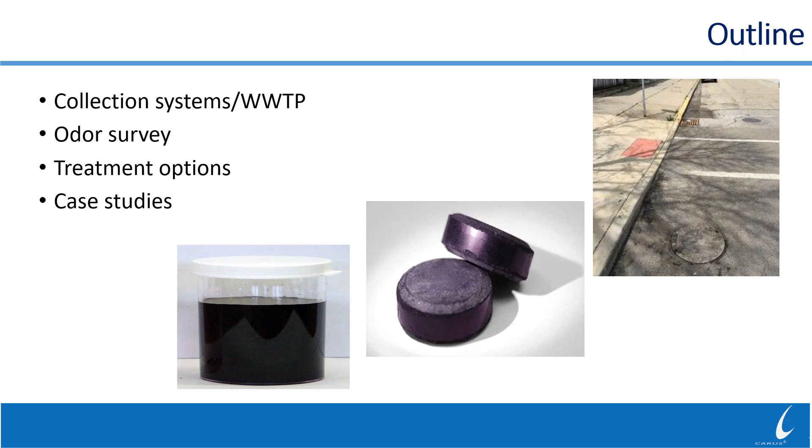So one of the first things you should think about when you get asked about an odor complaint is what type of odor are they experiencing? Is it being formed in the distribution system? Is it being formed in the plant? Where exactly do you have those odor issues? What are the reasons why you're looking to treat it? It could be as general as worker safety, which is very important, or it could just be nuisance complaints from neighbors near the plant or near that part of the collection system.

And then what are your options? There's maybe some simple things you can do to eliminate some odors at different parts of the plant by just moving the wastewater or getting the sludge through the plant quicker. But obviously, if you can't do that, then there's some things you can do for odor control that are chemically based.

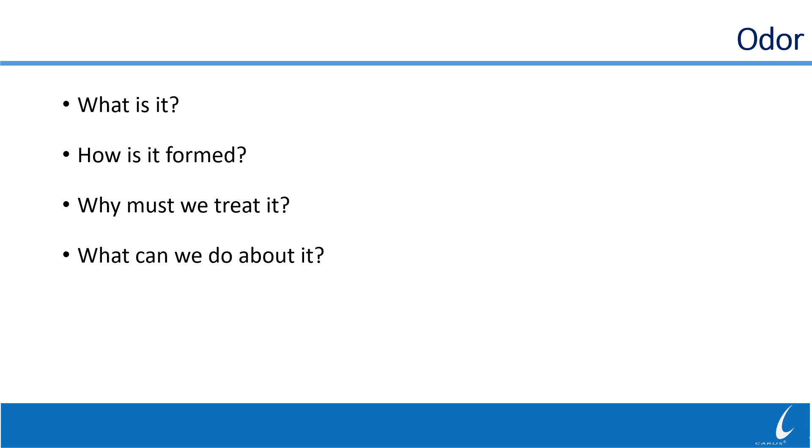When we talk about a wastewater system, there's a lot of moving parts and it's a very large system. You can be out in the collection system where you can have pump stations and force mains and gravity sewers, which are all different parts where you may have to do treatment. And the treatment may vary depending on where you're at in the collection system. You might have the ability to stage equipment and a pump, or you may need to have everything below the manhole cover or below the wet well cover, so you can't have anything exposed to the environment.

At the wastewater treatment plant, obviously you have the headworks where you might have some odor issues, but a larger source of odor is typically farther back in the process where you're doing sludge dewatering on a belt press or a centrifuge prior to trucking the sludge off to a landfill or for land application. The general issues that most plants experience are going to be nuisance odors. So they're going to have hydrogen sulfide and mercaptan odor issues from that process.

You may see some general equipment corrosion. Hydrogen sulfide can be very corrosive to both concrete and metal in the area. So if you're getting a lot of off-gassing of hydrogen sulfide, you can see that the concrete might be corroded. You might see rusting of the metal in those facilities around those high levels of hydrogen sulfide. And then in the collection system, you might see issues at pump stations, lift stations with grease removal, where the grease accumulates around the floats.

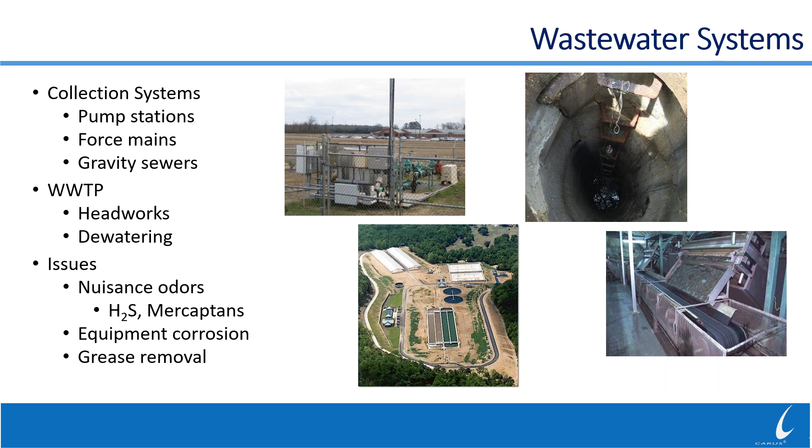Now, it's odd to talk about what type of odors you may encounter in wastewater, but sometimes they can tell you that you've got different compounds than the traditional ones. If you have an organic kind of smell that smells skunky, it's typically going to be some type of mercaptan-based odor. You can have other things like fishy, which would be nitrogen compounds. Obviously, depending on the type of wastewater you're treating, you might have an ammonia smell, which would be ammonia compounds. You could have fecal, decayed flesh, all sorts of different types of odors that you may encounter.

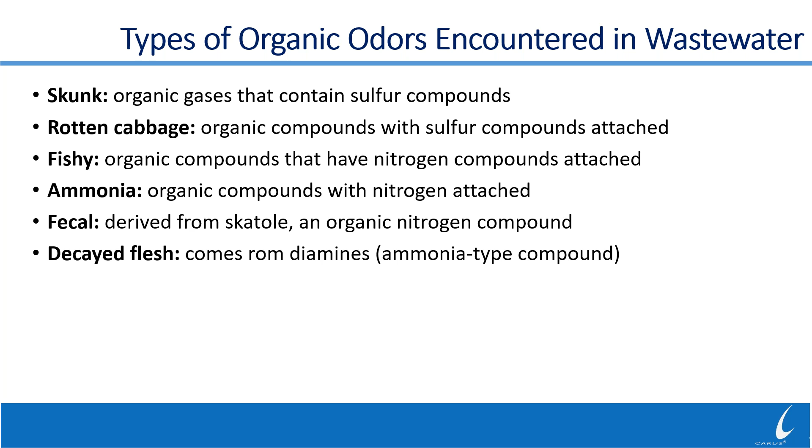One of the other things about mercaptans as well is a lot of people will claim that it clings to them. So if they're around an odor source that's generating some mercaptan, when they leave the area, they'll still be able to smell the mercaptan slowly over time as it comes off their clothes and out of their hair. One of the major compounds that we'll talk about is hydrogen sulfide, which also has a very low odor threshold and has the very distinctive smell of rotten eggs.

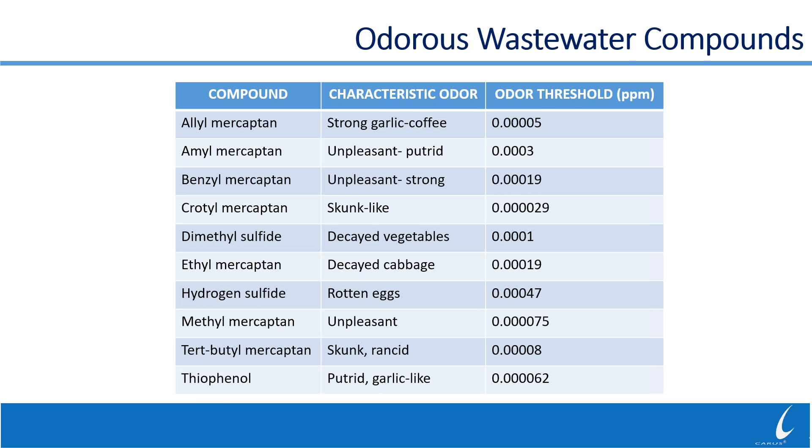So when we talk about wastewater issues, hydrogen sulfide is usually one of the easiest things to measure and usually is the one that's causing the most odor complaints. You may have some of the other mercaptan compounds mixed in as well, but they'll typically be at much lower levels. Some of the other things you want to be concerned about when you're doing an odor survey is you could have other gases that you may encounter. You may have a strong ammonia smell, which can cause your eyes to water.

And then you also have to be concerned with the hydrogen sulfide because you might also have it mixed in with carbon monoxide or carbon dioxide or even methane, depending on where you're at. So definitely when you're in confined spaces or areas where there's not a lot of airflow, you want to be concerned because all those different gases can displace oxygen from the air, and so it can be a hazardous environment for you to enter.

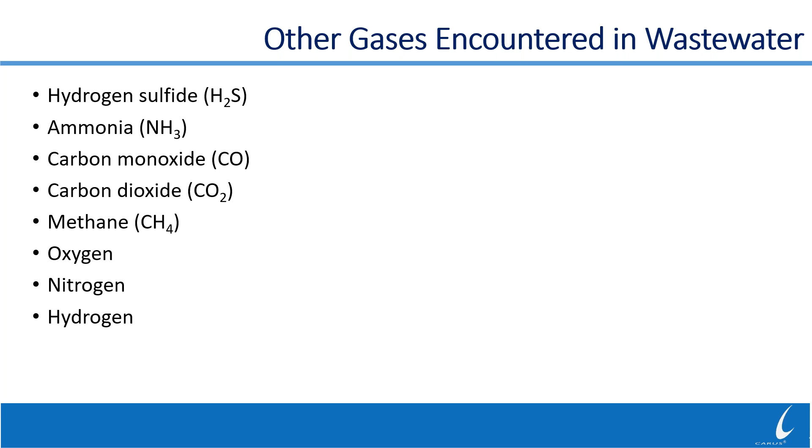Like I said, one of the largest compounds that you're typically going to encounter in wastewater is going to be hydrogen sulfide. It's colorless. It has the very distinctive rotten egg odor. So when you first walk into an environment with hydrogen sulfide, you'll definitely get that rotten egg smell. It's water soluble, so a portion of the hydrogen sulfide will be in solution, and then a portion, when it gets stripped out, will go atmospheric. It's extremely toxic. You're going to see an OSHA chart on what are the acceptable levels to be in the environment when you're around hydrogen sulfide.

In addition, hydrogen sulfide can mix with moisture in the air to form sulfuric acid, which is why it can corrode concrete and corrode metal in the application. Depending on how high the level of hydrogen sulfide can get, it can even get into a range where it can be considered explosive.

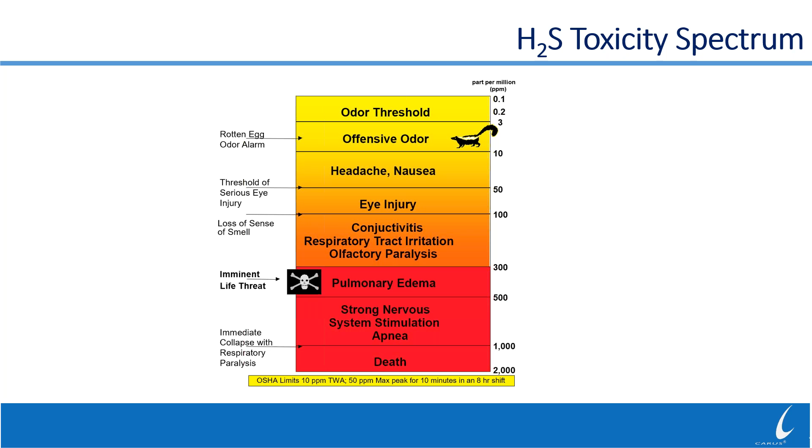So how does that hydrogen sulfide form both in your collection system and in your wastewater plant? Well, one of the things that's always present in your wastewater is a lot of sulfate material. So sulfate plus any type of organic material that's in the wastewater, so our waste from humans, will combine with anaerobic bacteria. And what ends up happening is that anaerobic bacteria start chewing up the oxygen off of the sulfate compounds. As they do that, they release sulfide into solution. And then with any type of turbulence, that sulfide that's in solution can come out as atmospheric hydrogen sulfide. So you'll get that kind of loop in the system.

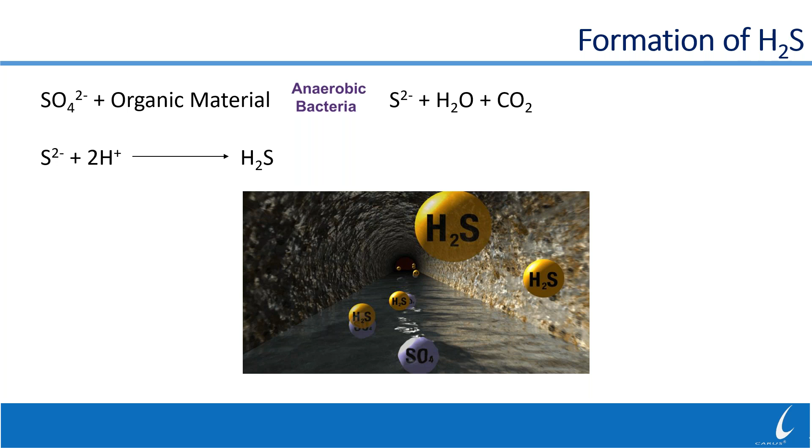And really it's based on the longer that wastewater sits and you lose all your dissolved oxygen, now the bacteria is looking for another oxygen source, and so the sulfate is plentiful, so they go after that oxygen on the sulfate. Keep in mind that sulfate-reducing anaerobic bacteria, they thrive at low oxidation reduction potentials. So when you don't have any dissolved oxygen, they're going to predominate the biofilms out there in the collection system. Ideally, they like pHs between 6 and 9. So those are the standard wastewater pHs you'll see out in your collection system. So that's a perfect environment for them.

Wastewater is always warm. So they have the nice warm temperature to keep them respirating and chewing up the sulfate to generate hydrogen sulfide. So you have a perfect environment both out in the collection system and in your plant. As that wastewater sits, you'll chew up all your dissolved oxygen, and the bacteria are in a perfect environment to generate more and more hydrogen sulfide.

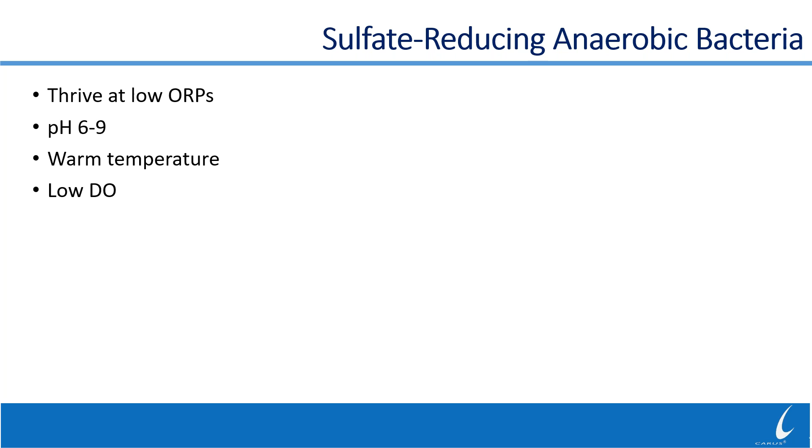That turbulence then, or just the amount of hydrogen sulfide that's in solution, eventually some of it will go atmospheric as it's an equilibrium. So some of it will slowly bubble out of solution. So now you get some hydrogen sulfide in the air in that pipe. It interacts with the moisture on the pipe wall, and you generate some sulfuric acid. That sulfuric acid runs down the pipe wall, corroding the top or the crown of the pipe. And then it comes back into solution, and now you've generated sulfate back into solution that the bacteria can chew on again, and then it repeats its cycle continuously.

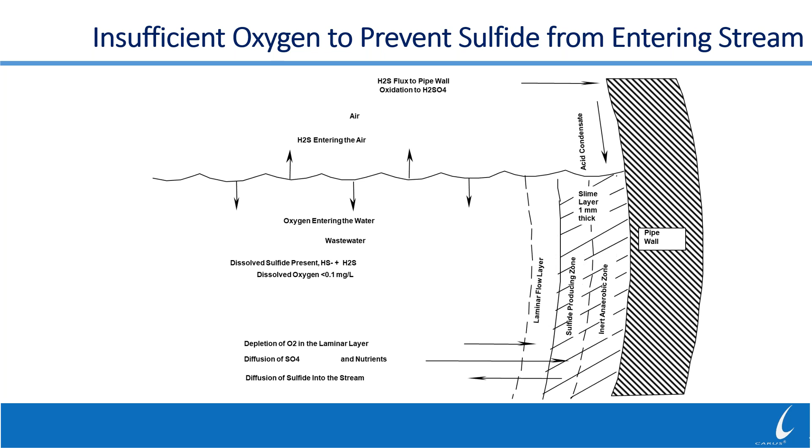So one of the things when you're doing pH adjustment in a system for odor control is you're typically going to try to target a pH above 9, somewhere between 9 and 10. But as soon as that pH drops back down, that sulfide is still there. It can be released back into the atmosphere. So you do need to take into consideration that when the pH drops, it's going to come back out of solution.

A question we get asked all the time at CARUS is, I only have atmospheric numbers for my hydrogen sulfide. Is that a way that I can tell how much dissolved sulfide I have in solution? Well, the answer is it can give you an idea of how much you might have, but because the hydrogen sulfide in the atmosphere is based on the size of the area you're in and how much is being released, it doesn't really translate one-to-one.

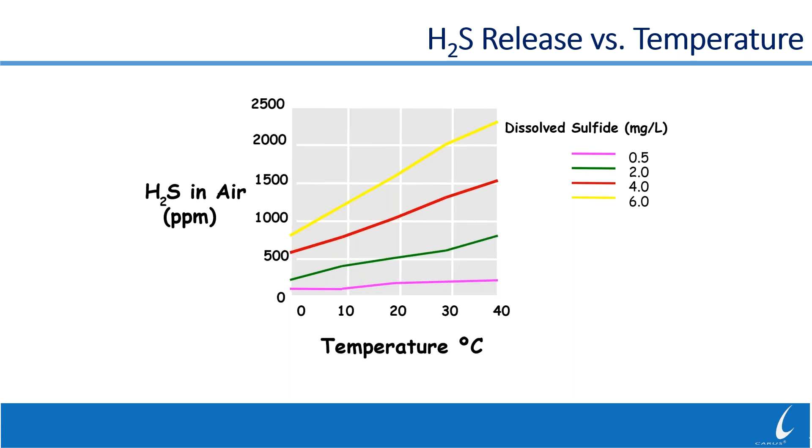When we talk about sulfide, one of the easiest ways to remove it and one of the quickest ways to remove it is permanganate oxidation of sulfide directly. So if you have dissolved sulfide in solution, you can add permanganate directly to that wastewater or that sludge, and regardless of whether it's acidic or neutral or basic pH conditions, we're going to oxidize it.

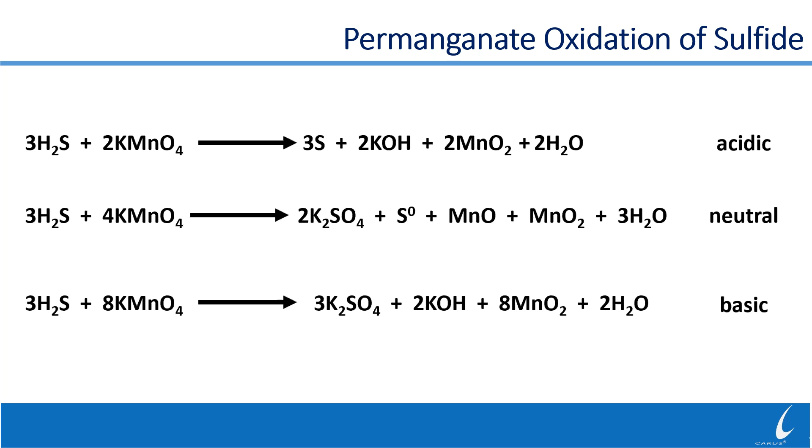One of the benefits of permanganate oxidation is its rapid reaction. As soon as you add the permanganate to the wastewater or to the sludge, it's going to react with the hydrogen sulfide and mercaptan compounds and eliminate them immediately.

One of the tests we do in the field is a jar test called a shake test, where we add wastewater or sludge to a jar, we add our permanganate, we mix it for a few seconds, and then we shake it to determine how much sulfide we can strip out of solution. In that test, just a couple seconds of mixing is enough to eliminate all the hydrogen sulfide and mercaptan, and then we'll be able to measure that we've knocked it completely out in those jars.

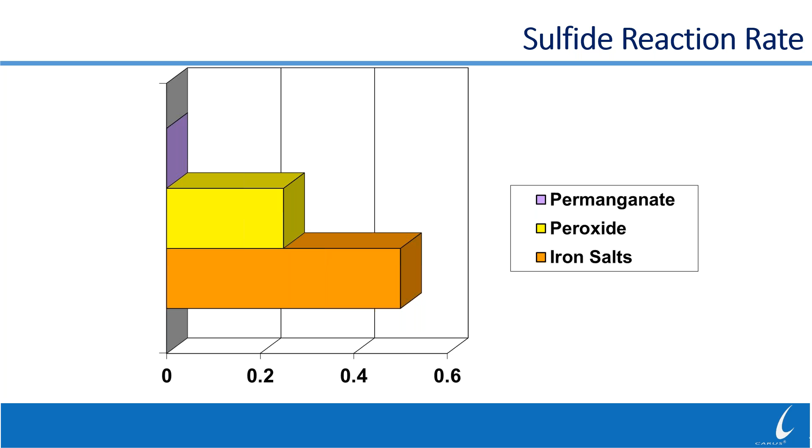Some of the other compounds you may see for odor control are hydrogen peroxide and iron salts. Typically, both of those compounds need reaction time to remove hydrogen sulfide from the wastewater or from the sludge. So generally, you would feed them way upstream and generally have a contact tank or might have multiple feed points in order to knock the hydrogen sulfide odor down. Whereas with permanganate, you can have one application point right where you need odor control.

One of the other compounds that I had talked about earlier are mercaptans. Mercaptans are all those kind of funky odors. So the fishies, the garlics, the other septics that aren't rotten egg. Permanganate also reacts with those very rapidly.

And then iron salts, which generally work the best with precipitating hydrogen sulfide, they're not the best for mercaptan removal. You can see we fed almost 1,500 parts of iron salts, and we were only able to get it down from roughly 35 to just under 25. So in that case, only the peroxide or permanganate would be viable options, and the permanganate is at a much lower dosage to get rid of the mercaptan compounds.

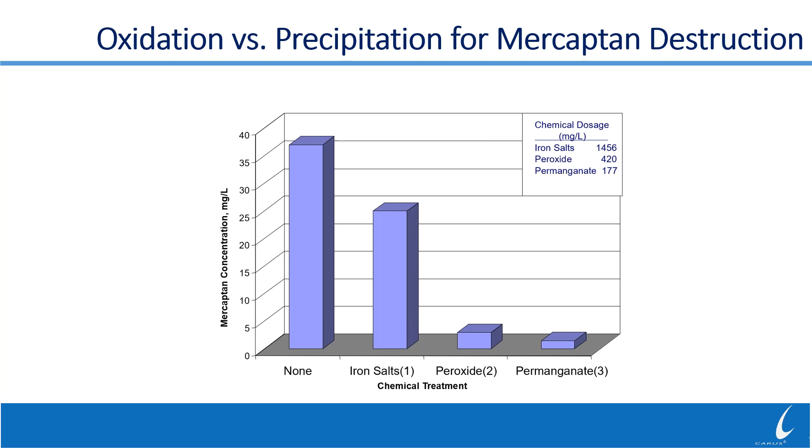One of the things that you need to do when you're doing an odor survey is you want to systematically collect information about your wastewater system. If you're out in the collection system, one of the things you want to keep track of are what are the flow rates? Do those flow rates change over the course of time? So are they higher in the morning when people are at home and waking up? Are they higher at night when people are taking showers and doing dinner? So kind of have an idea of how your flow rates change over the course of time in your collection system.

Where are you getting the odor complaints? Is it from the discharge of a force main? Is it specifically around a lift station or a pump station where you're getting a lot of odor complaints? Is it generally a run of manholes in a downtown area and you're getting complaints from people being out shopping or on the sidewalks? Once you determine where you think those odor issues are, then that's definitely a place to put some monitoring equipment in and measure the levels of hydrogen sulfide and mercaptans that you have in those areas. You want to take this data and analyze it to make sense of where you're actually going to feed and what's the best treatment that you can do.

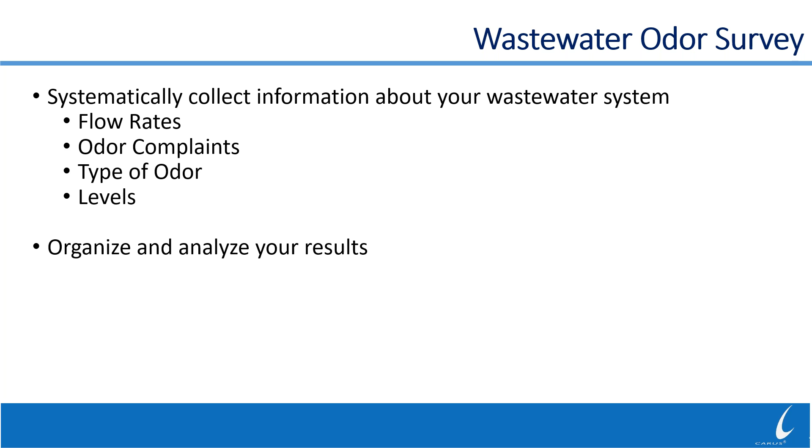When you're doing that odor survey, there's a lot of different types of monitoring that you can do. There's many commercially available hydrogen sulfide gas sensors that you can use. A lot of those gas sensors you can actually leave in a manhole or a lift station or pump station, and they'll log data over a week to 2 weeks, and then you can download that and look at the graphs to see when are you getting your major odor complaints. Do they then tie into when you have flow changes in the system based on when people are home? But when are those complaints really happening?

You can do some air sampling with Draeger tubes to determine different mercaptan compounds you may have. And then finally, you can measure dissolved sulfide with many different types of dissolved sulfide kits. You can sample the wastewater and do it multiple times in a day to just see if there's some variation. And one of the things you can also do is, if you have some type of monitoring, those times where you see higher spikes of hydrogen sulfide in the system, that would be a good time to go out and pull some wastewater samples at those specific times to see if it matches up with high dissolved sulfide readings at that time as well.

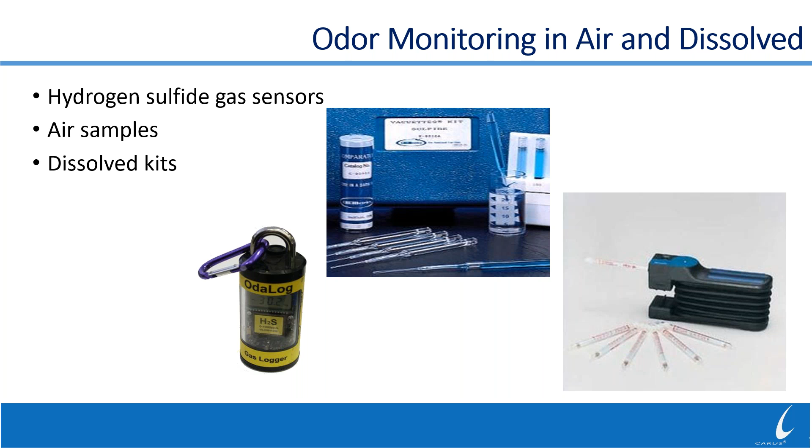When you're out in the lift station, one of the things you do want to do is get an overview of the collection system. So specifically, where do they have their odor issues? And then you kind of want to draw a map upstream and downstream of that point where you're having the odor issue. They'll typically have maps of how their collection system is laid out and where everything is. So one of the things you want to keep track of is there a lift station or a pump station upstream that you could stage chemical at? Does it have the ability to do power to a pump? What all do you have access to?

And then downstream, where are you seeing the odor complaints? Is it just at one manhole, which may be the discharge point for the force main? Is it just a gravity sewer discharge point where you're getting complaints? What is downstream of it? Basically map that out so you can see where you can feed upstream or at the application point, and then what are the issues that you maybe see downstream as well.

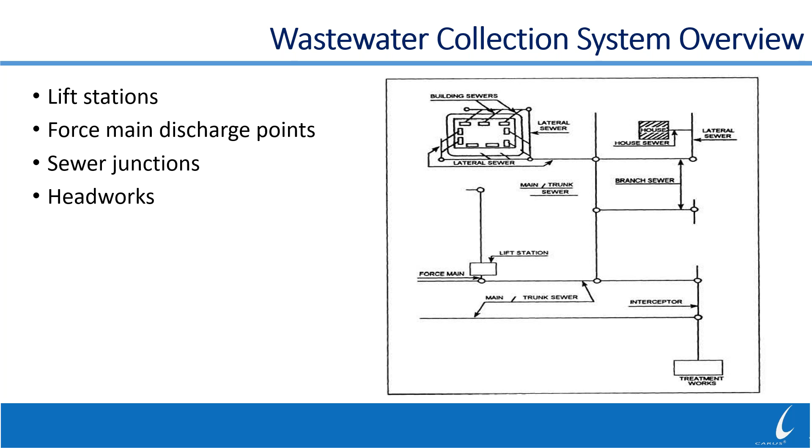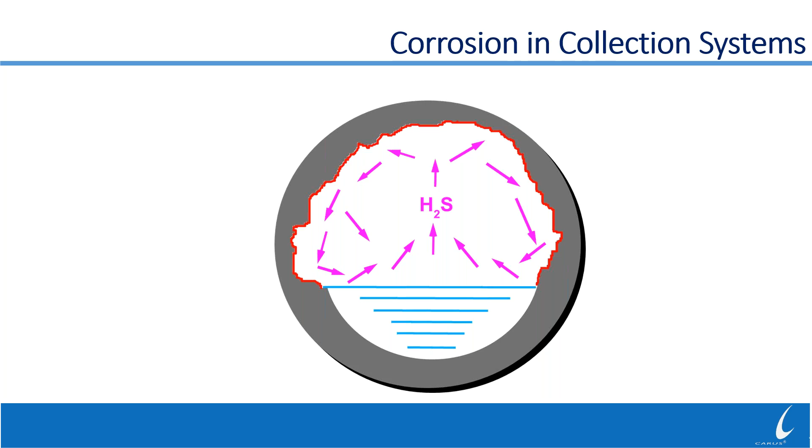In the past, we've seen this with customers that we've worked with before they did treatment. We were working with a chicken plant in South Carolina, and they actually had part of their sewer line collapse, and the only thing on it was the chicken manufacturing plant. They had to run a new line to get the chicken processing plant back up and running, and then they put in permanent treatment for odor control to prevent a sewer collapse in the future.

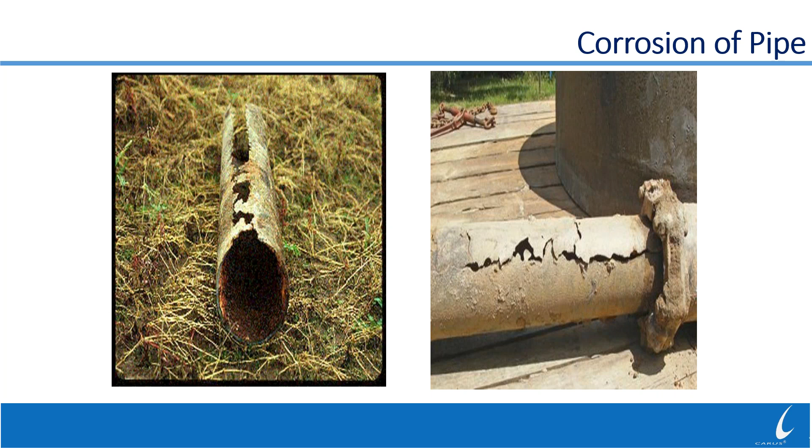So one of the things I always do is when I flip open the manhole and see a lot of corrosion, wherever I'm going to hang the monitor, I'm going to do that double check to make sure everything's solid that I'm attaching to, so I don't lose my equipment downstream if that thing falls out of the pipe wall.

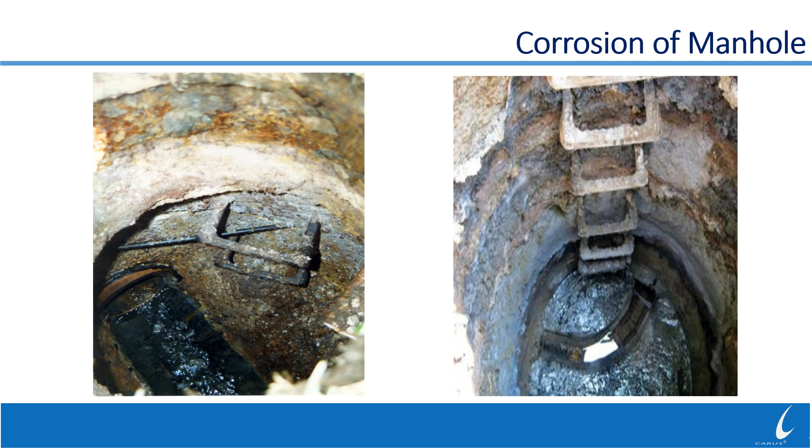There are some things that you can do out in the collection system to prevent the hydrogen sulfide formation. If you can maintain adequate flow velocities, meaning you're moving the wastewater quickly from the homeowner to the wastewater plant, that means you're going to minimize the detention time out there in the collection system. As that wastewater moves quickly to the plant, it doesn't have time to generate as much hydrogen sulfide as it would if it sits for long periods of time at lift stations or pump stations.

So one of the easiest things you can do is, can you get those pump stations to run more often? Can you get that wastewater to move quicker to the plant? Sometimes that's not possible because systems are designed for future growth. So some of the pump stations and wet wells might be much bigger than they need to be because they're planning for having more people living in the area in the future. There are still some things you can tweak with flows and levels in those wet wells, and those are things you want to do right off the bat to try to minimize the hydrogen sulfide formation.

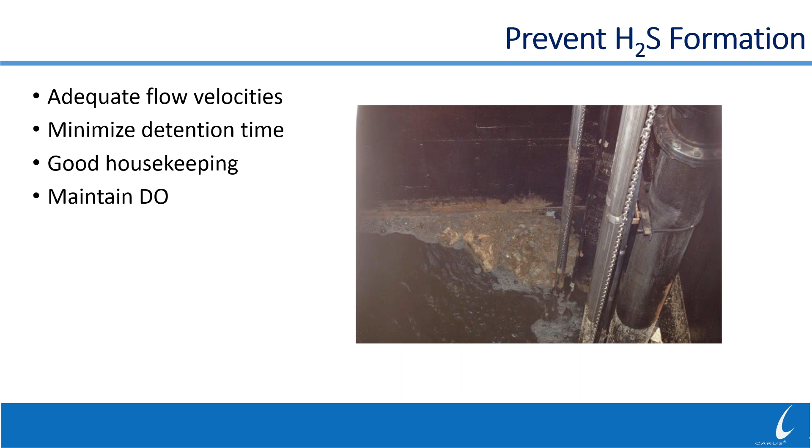One of the things at CARUS Corporation is we have a lot of different products that you can use for odor control, and they all kind of have a role depending on where you're at out in the collection system or at the treatment plant. They also can be picked based on what's your flow rate and what kind of reaction rate do you need.

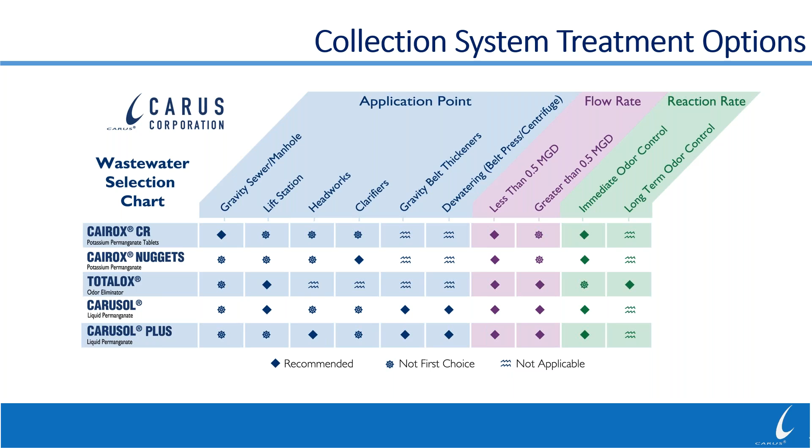So in the collection system, you have multiple treatment options. You have CARUSOL liquid permanganate, you have TOTALOX odor eliminator, you have CAIROX CR potassium permanganate tablets, and you have CARUSOL plus liquid permanganate.

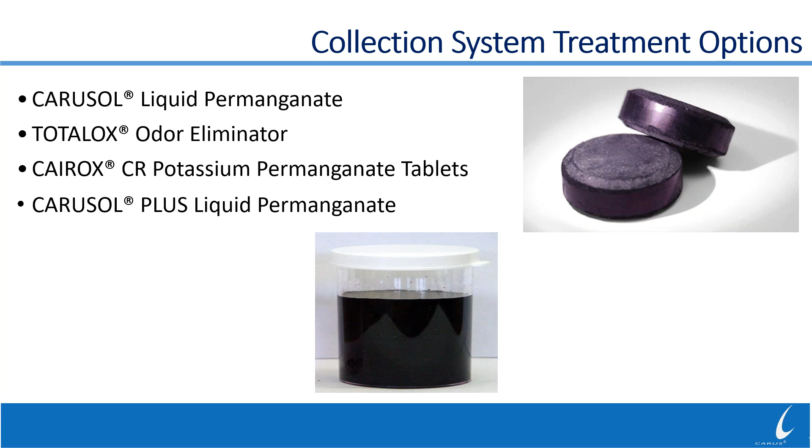The first product we're going to talk about is CARUSOL liquid permanganate. The product is sodium permanganate based. It's available in a 20% or 40% concentrated solution. And the packages it's available in are 55-gallon drums, 250-gallon bulk IBCs, or in bulk loads, depending on how much you're going to need to apply. The CARUSOL liquid permanganate is a dark purple solution that you see in the bottom picture. And you'll see it available in either the 20 or 40% concentration.

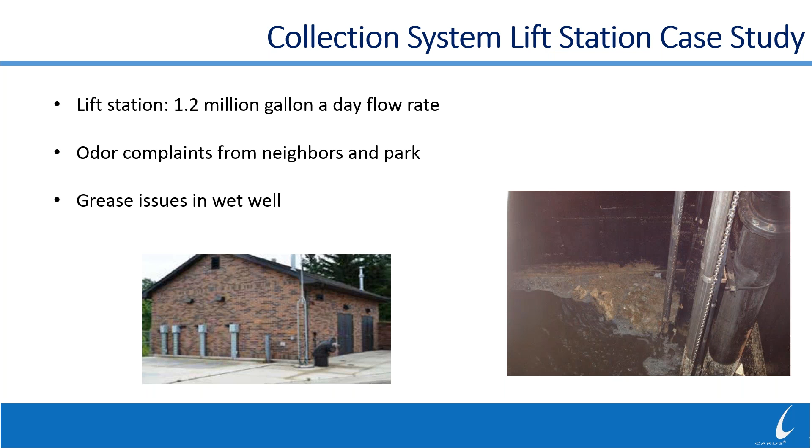As part of the odor survey, a data logger was suspended in the wet well to collect baseline hydrogen sulfide data. What we found over the course of multiple days was there was an average of about 14 ppm in the wet well itself, and occasional peaks of 80 parts per million. The idea, because most of the odor complaints were coming directly from this lift station, was to do the treatment as the wastewater came into the lift station to eliminate it. So we needed immediate odor control, so we wanted a high permanganate concentration. There was no upstream lift station. Everything that was coming into this wet well was gravity sewer from homes.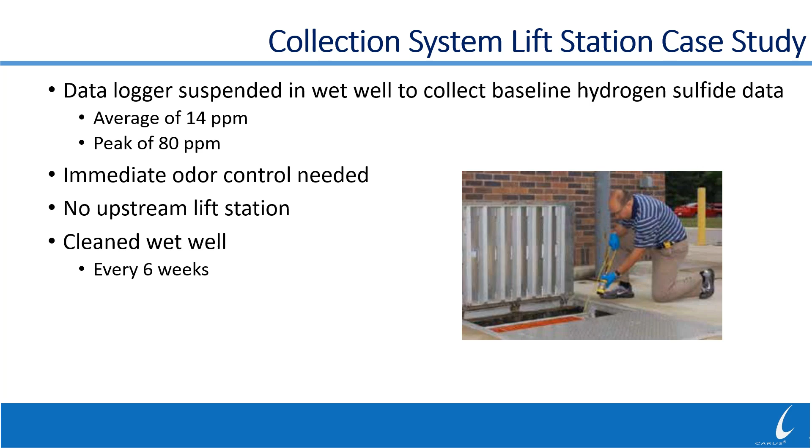What they were also doing is they noted that they had to clean the grease out of the wet well approximately every 6 weeks to knock it down and break it up so it could be pumped out so it wouldn't impact the floats in the wet well. They chose CARUSOL liquid permanganate. They had space inside the building to set up two 55-gallon drums of the CARUSOL. And when we did the odor data, we noticed that there was different times of day where they had odor complaints and the flow went up.

So the feed system was 2 metering pumps, and they were both on timers. One timer was set to run most of the day, and then the other timer was set to kick up the feed rate and turn on the second pump to vary the feed rate to get a higher dose at those times. Once we did treatment with about 5 gallons per day of CARUSOL to treat the 1.2 MGD, the average hydrogen sulfide in the wet well dropped to 0 ppm, and the peak dropped from 80 to 10.

One of the other things they noticed is that they only had to clean the wet well for grease issues 3 times per year instead of every 6 weeks. They also noticed that they had no more odor complaints from the neighbors near the pump station or from people watching their kids play soccer in the park at the soccer field. So it eliminated their odor complaints, eliminated their grease issues all at the lift station where the feed system was located.

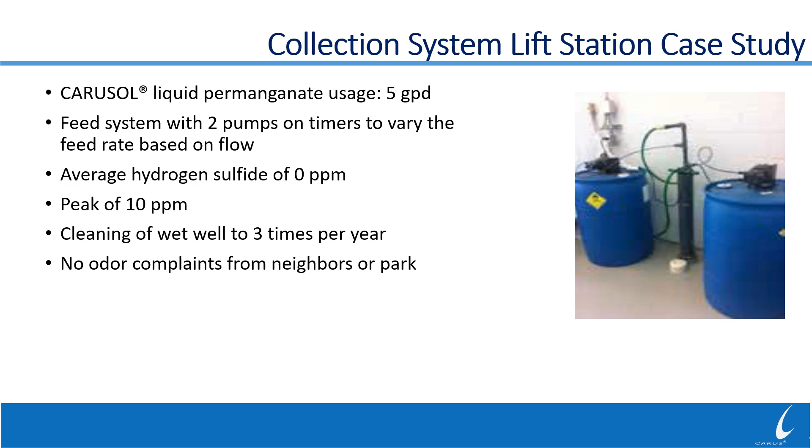One of our other products is TOTALOX Odor Eliminator. It uses a small amount of permanganate for oxidation of hydrogen sulfide, and then it uses nitrate salts for the inhibition of sulfate reduction. The bacteria that you have out in your collection system typically would love to chew on dissolved oxygen. Once they run out of dissolved oxygen, if you give them a nitrate source, they'll chew on the oxygen on the nitrate. If they run out of nitrate, then they'll start chewing on the sulfate and generating hydrogen sulfide. So you can eliminate the sulfide reaction by giving them nitrate to chew on.

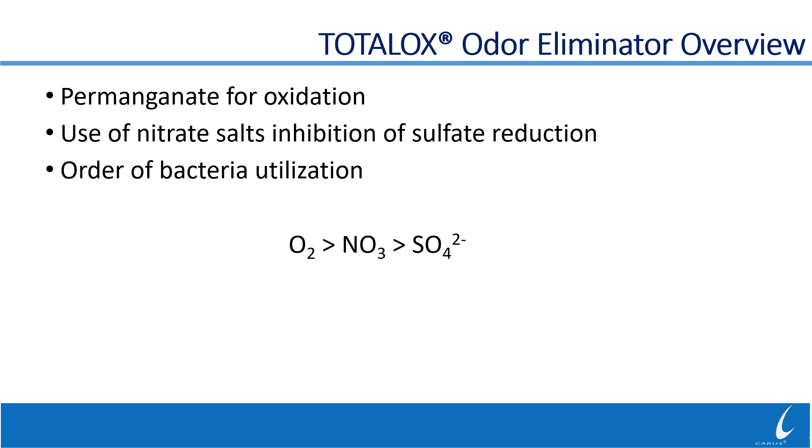A general rule of thumb with our TOTALOX odor eliminator is that we need approximately 2 to 4 gallons of the TOTALOX permanganate nitrate blend per pound of sulfide to be removed in the wastewater. Our general goal when we feed this product is to try to achieve a dissolved sulfide in the effluent, where we're trying to have odor control downstream, of 0 milligrams per liter of dissolved sulfide. As the dissolved sulfide drops, you'll reach an inflection point at the bottom where you'll have no dissolved sulfide, and then you may see some nitrate residual as it starts to be in the system.

The general goal is to have very little nitrate, or, depending on if you're trying to contain the nitrate a little farther downstream, maybe through multiple lift stations, maybe the first lift station or manhole will have a little bit of dissolved nitrate, and then the farther ones downstream, that level will drop off as the bacteria chew it up, and then eventually you'll have no nitrate going into the treatment plant.

Some of the factors that can affect the dosage: if you have really warm temperatures, it may require higher dosages. A lot of times we have systems that feed in the summer months, when they have their odor complaints and their most issues. And then when they get into the cold winter months here in the Midwest, they don't have to feed as much, or they don't even have to feed in the winter months.

Also, one of the things to keep in mind, if you have longer detention times, so the wastewater is sitting longer in those wet wells, or it takes longer to get to the treatment plant, then you might have to feed a higher dosage toward that 4 gallons in order to keep enough nitrate in solution for the bacteria to eat.

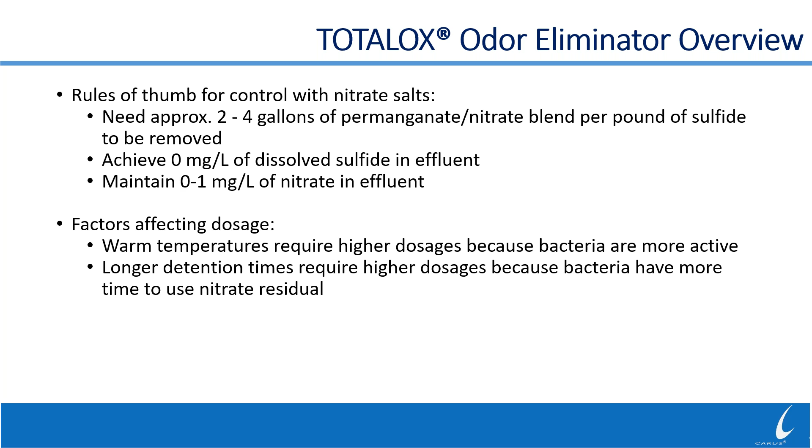Our case study here was a southeastern county in the US, and they had a very large wastewater collection system with many, many pumping stations throughout. They specifically had one lift station in particular that was causing many, many odor complaints. The reason was it was near a busy road, and as you can see in the picture, there's the pump station, and located directly behind it is the primary school for this county. One of the issues is the primary wind direction was blowing from the pump station directly toward the front of the school.

So both in the morning and at the end of the day, when people drop their kids off or pick their kids up from school, if there was any type of wind blowing toward the school, they would get a lot of odor complaints because you could smell the rotten egg odor from the pump station itself.

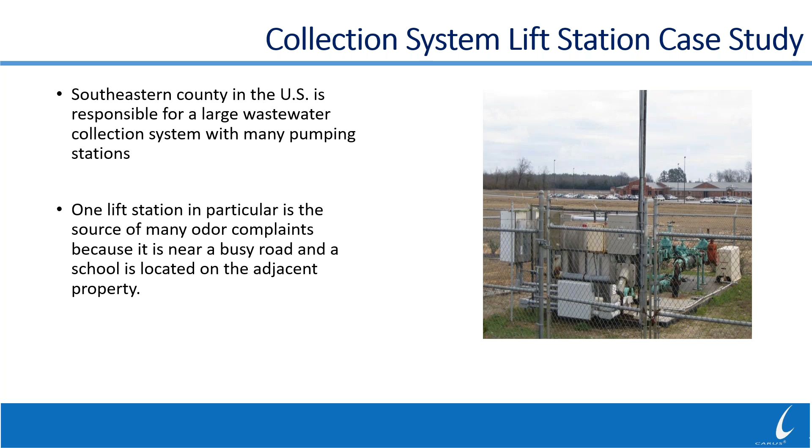The county referred to this as the highway lift station, and it got wastewater from 2 locations. Most of the flow was coming from a force main that was about 100,000 gallons per day upstream, about 3.4 miles up from the school. There was a smaller amount being donated by the school of about 5,000 gallons a day. So when we looked at the 2 sources of wastewater coming into the lift station, most of the odor was all based on the 100,000 gallons per day coming from the upstream pump station, and very little odor was being contributed by the school when it was in session.

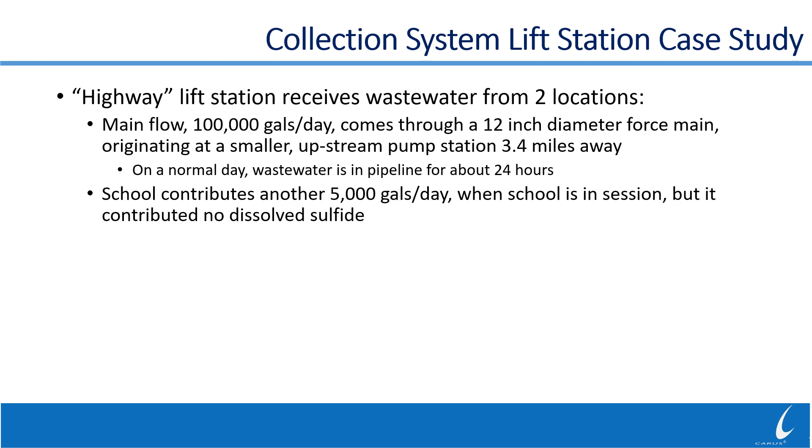The initial survey found about 4 to 5 milligrams of dissolved sulfide in the wastewater coming from the upstream pump station. Atmospheric sulfide was as high as 5 ppm leaving the vent at the lift station, and it was greater than 50 ppm in the wet well. You can see the inside of the wet well with the lid open and the green coating. They'd actually applied that green coating because they had to replace parts of the wet well because the concrete had corroded so bad. So in order to prevent that from happening after they replaced it, they put the green coating on it to prevent that interaction with the hydrogen sulfide in the atmosphere.

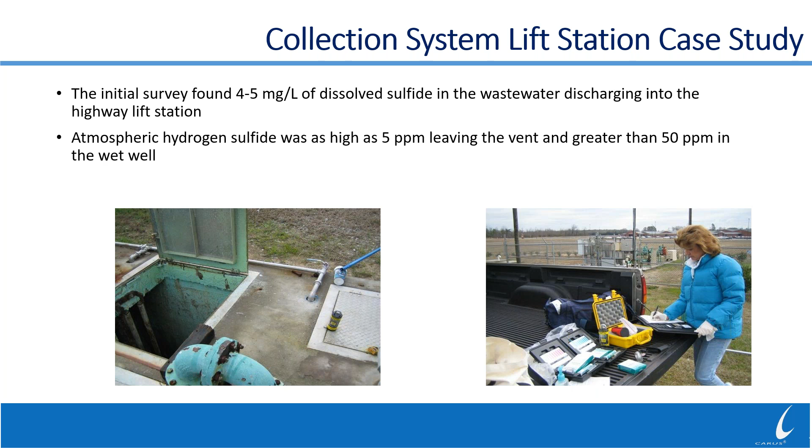Treatment was begun at the upstream lift station. They placed a tote inside a fence line with a metering pump on top of it. The dosage started at 10 gallons per day, and then the dosage was increased to 15 gallons per day when we were still getting some occasional odor complaints based on the lower dosage of 10 gallons per day.

With treatment, the dissolved sulfide levels at the lift station in front of the school dropped to less than 1 milligram per liter. The atmospheric hydrogen sulfide discharging from the vent at the wet well was 0 ppm, and in the wet well itself, we were less than 5 ppm.

Once the treatment started at the higher dosage of 15 gallons per day, they got no additional complaints from the school, which was what their objective was. Plus, they knew because there was less hydrogen sulfide, there'd be less future corrosion on that wet well and the equipment located there.

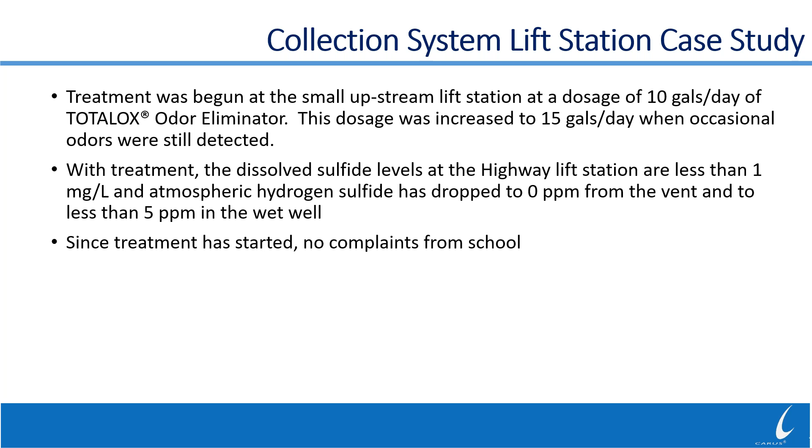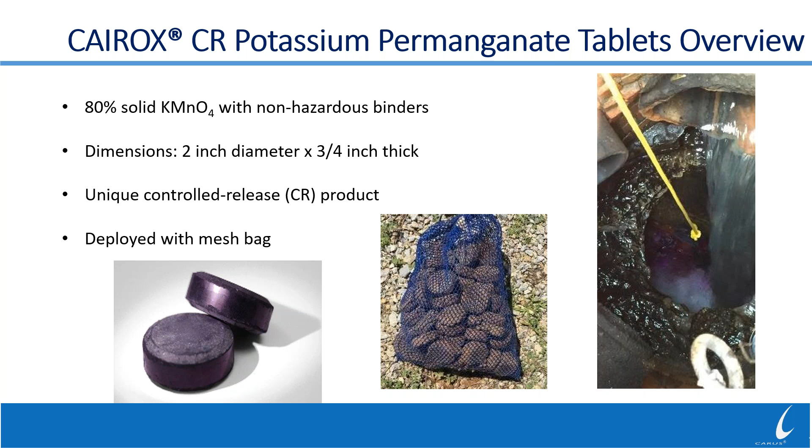As you can see in that right-hand picture, the wastewater is pouring down, and at the bottom you can see some purple disturbance where the tablets are dissolving. We've done multiple field trials and tests with the tablets to get them right.

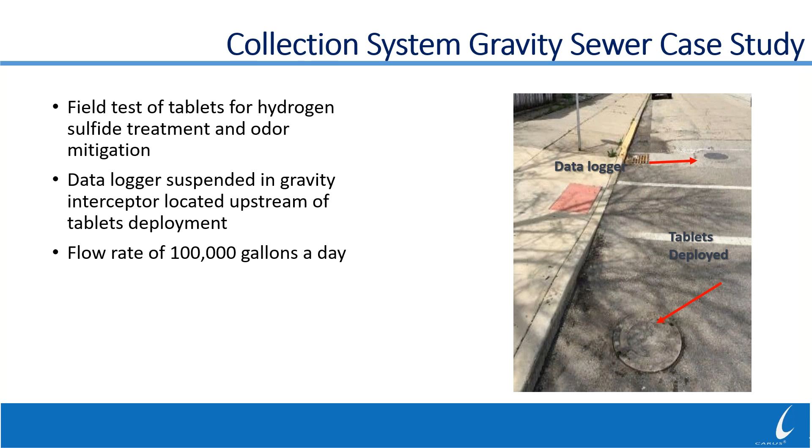We initially started with 10 pounds of the tablets in that mesh bag, and we measured both the bag weight and the hydrogen sulfide concentrations recorded over time to determine how well they were working in the system.

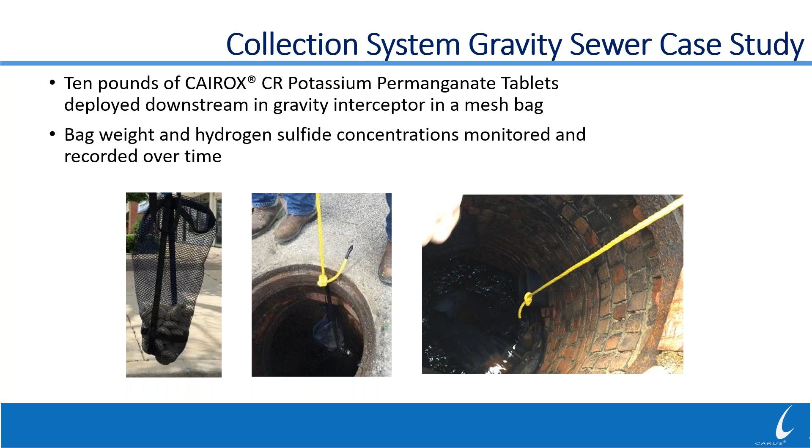One of the things you can do, because this is such a low-tech application with the tablets, is you can vary how many pounds of tablets you put in the mesh bag. You can also vary how much of the mesh bag is exposed to the wastewater flow. So is only half the bag in the flow, is only 1/4 of the bag in the flow. And what you can do is basically, based on the hydrogen sulfide monitoring you're doing, you can see is there a difference with treatment and how much of the bag and how much poundage do you have in the bag.

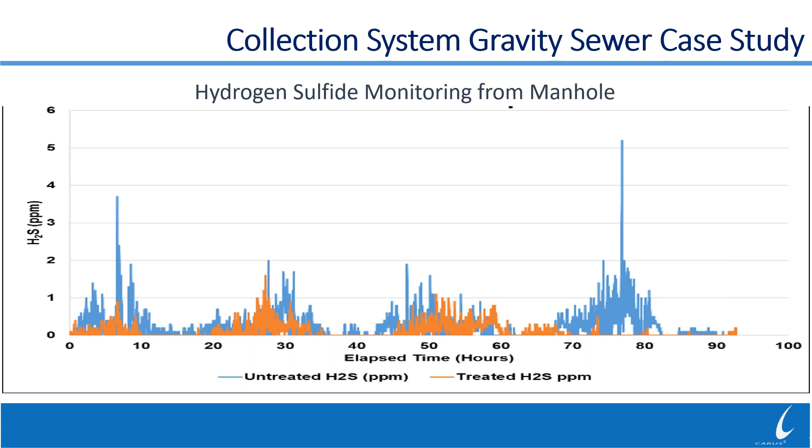One of the questions we often get asked with the tablets is how often do I need to replace them? Well, it's going to be dependent on how much of the bag that you have exposed to the wastewater flow. So if you're hanging half of the bag in the flow, it's going to use these a little quicker rather than if you only have maybe a quarter of the bag or less in the flow.

On the low flow side of things, typically we would say if you're under 50,000 gallons per day, probably every 2 weeks-ish, you would have to replace the tablets. If you're somewhere between 50 and 100,000 gallons per day, maybe just over once a week. And if you have a much higher flow up to about a half an MGD, then you might have to replace them once a week.

Many systems that use the tablets might check on them weekly just to make sure that they've got tablets in the bag, make sure there's not been any rags that have collected on the mesh bag. So they'll shake the bag on the rope to make sure that everything's working well, and do it as a weekly round thing.

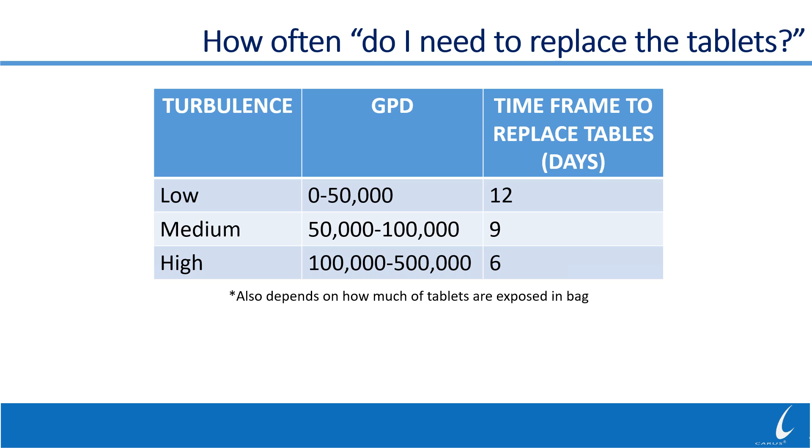So as you can see, we have a lot of different treatment options out in the collection system, and it really depends on where the odor is. Well, the same thing is true when we move into the wastewater treatment plant itself. You can be at the headworks where the primary wastewater is coming in. You may have issues with aeration tanks or clarifiers having odor issues, or you may have issues at the back of the plant where you're doing sludge thickening and sludge dewatering on belt presses or centrifuge.

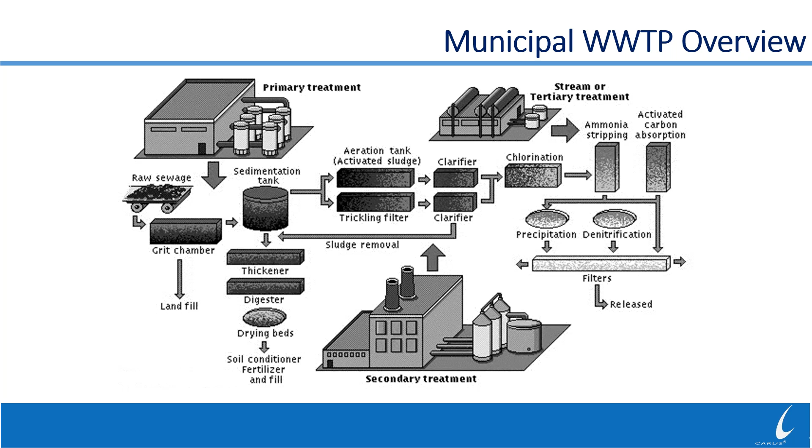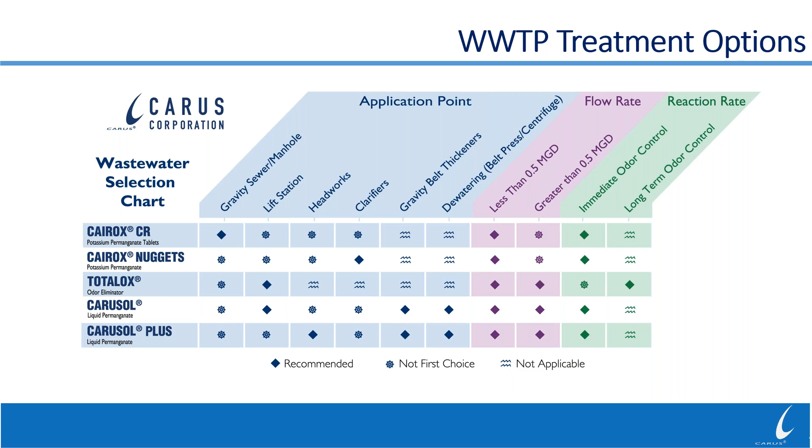You won't use a product like TOTALOX because you don't want to introduce the nitrate into the wastewater plant itself, because the bacteria will chew on the nitrate and generate some nitrogen gas, which can cause some of your sludge in your clarifiers to float. So generally, TOTALOX is only ever used out in the collection system. And then when you move into the plant, you're going to mainly focus on permanganate applications. So your options typically are going to be either CARUSOL or CARUSOL Plus.

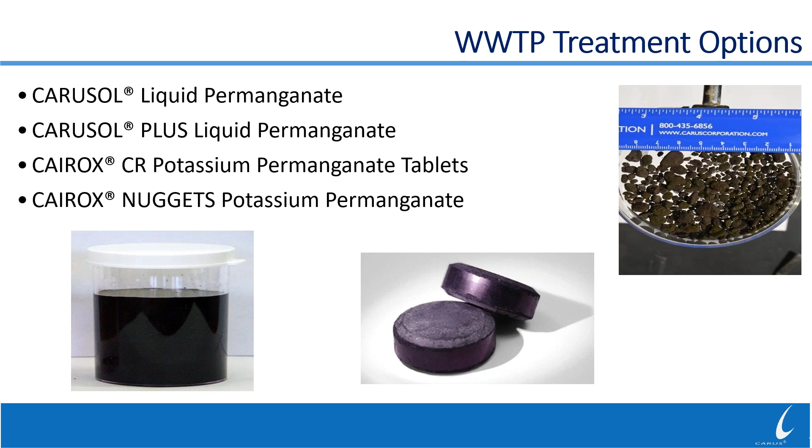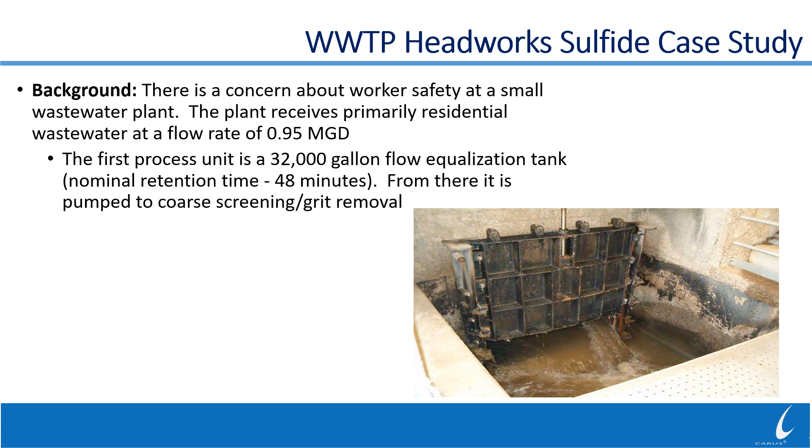So our first application here for odor control is going to be for CARUSOL liquid permanganate. The background was the wastewater treatment plant had a lot of issues with odor control at the front of the plant. It was primarily residential homeowner waste, and they treated about 1 MGD. At the very front of the plant, they had what they called an equalization tank prior to it being pumped to coarse screening grit removal. And they were generating a lot of odor complaints from this first part of the process.

The plant staff often had to go down to the coarse screening grit removal area, and they would have to rake the screens to remove stuff off the screens into a container. One of the things that they would notice is sometimes they would have on bad days as much as 40 to 100 ppm of atmospheric sulfide in that room. The manager wanted to get the sulfides to less than 10 ppm, and he really wanted to target less than 5 ppm because that would allow the staff to work in the building for longer extended periods of time.

They did have ventilation fans in the room, and one of the complaints they had is anytime they would turn the ventilation fans on to make it safer for the workers, they would then get odor complaints from the neighborhood because they were discharging all that hydrogen sulfide to the atmosphere, and then it would drift through the neighborhood and cause complaints.

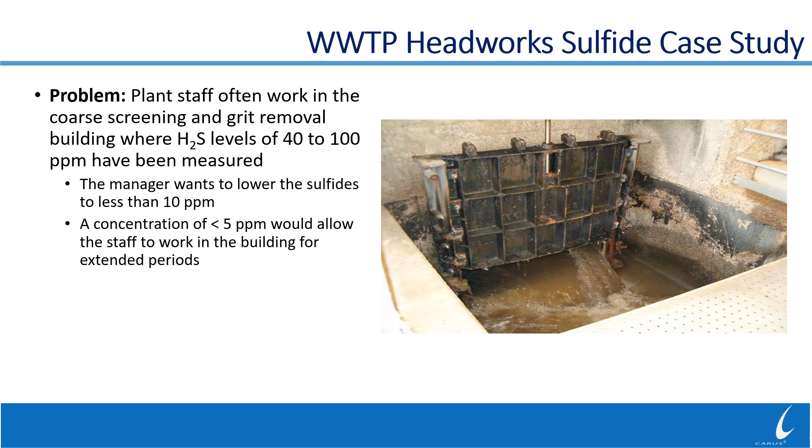Initially, the liquid permanganate was injected into the wastewater at a really high dosage of 100 milligrams per liter. After 2 hours of treatment, the atmospheric sulfide dropped down to less than 5 ppm. The permanganate treatment was lowered to 50 milligrams per liter, and we were down to 2 to 3 ppm, and we were able to finally go down to 25 milligrams per liter, and the sulfide level stayed about 2 to 3 ppm in the atmosphere.

And really that large dose at the beginning was to get a lot of permanganate into the equalization basin so that we could turn it over quickly and get the odor knocked down immediately, and then turn back to a normal dosage to just treat the wastewater that was coming in and maintain that odor control. Based on this system, we were able to get below 5 ppm of hydrogen sulfide in the room, and it was an easy system for them to apply the permanganate directly to the wastewater coming in and knock the odor down.

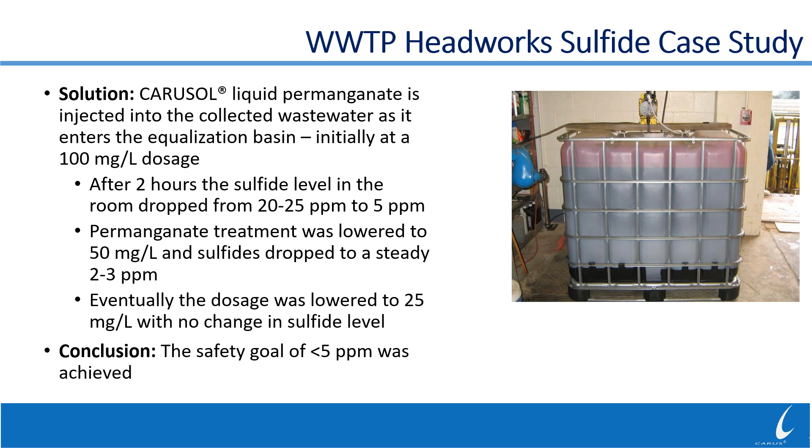Our next case study here was sludge dewatering. It was a large plant treating 27 mgd of wastewater, and they daily dewatered sludge on a centrifuge. Average biosolids to the centrifuge were about 100,000 gallons per day, and they treated about 160 gallons per minute on the centrifuge, and anywhere from 2 to 2.5% wastewater solids. The biosolids going to the centrifuge were 60% primary and 40% waste-activated secondary sludge.

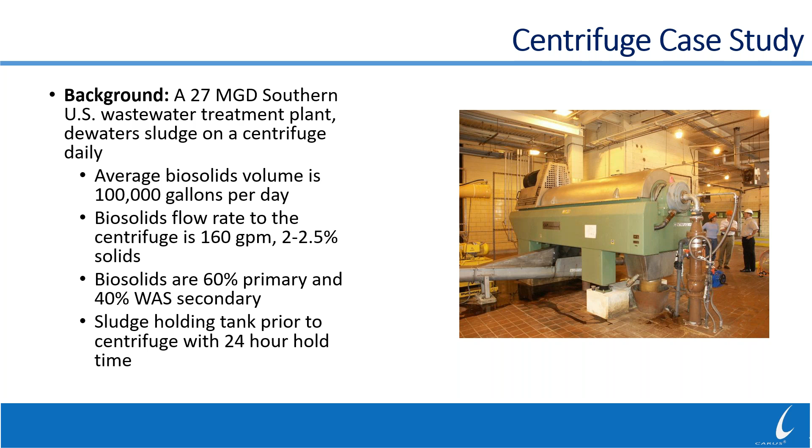Prior to the sludge going to the centrifuge, they had a sludge holding tank that could hold roughly 100,000 gallons per day of biosolids. So there is about 24 hours of detention time for the sludge prior to it being dewatered on the centrifuge. The issue they were encountering was the biosolids would go septic in the holding tank, and then when they would turn the holding tank on to start transferring over to the centrifuge, they would get odor complaints from both the holding tank, and then as they dewatered the sludge, they would get odor complaints.

The hydrogen sulfide in the room could get as high as 50 ppm. The H2S above the centrate line would get as high as 150 to 180 ppm. And the dissolved sulfide in the centrate that was being recycled to the front of the plant was anywhere from 2 to 3 milligrams per liter being put back to the front of the plant. Worker safety for this plant was a big concern.

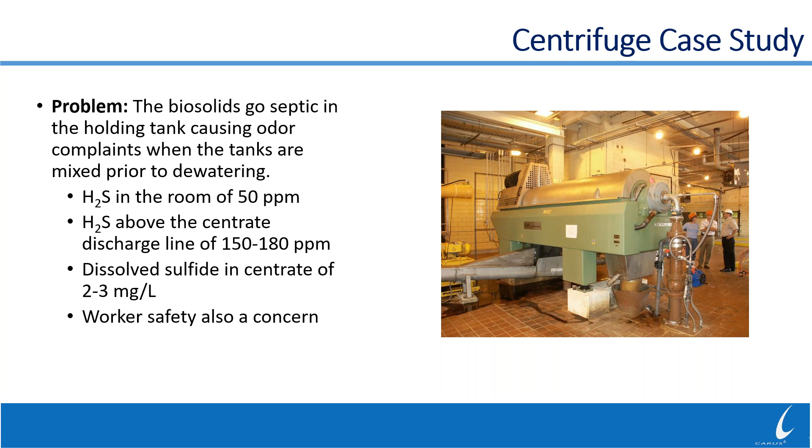The solution was to inject liquid CARUSOL permanganate into the sludge pump to treat the sludge going into the holding tank. A full-scale plant demonstration determined that they needed roughly 30 gallons per day of liquid permanganate, which roughly turned into about 75 milligrams per liter as sodium permanganate.

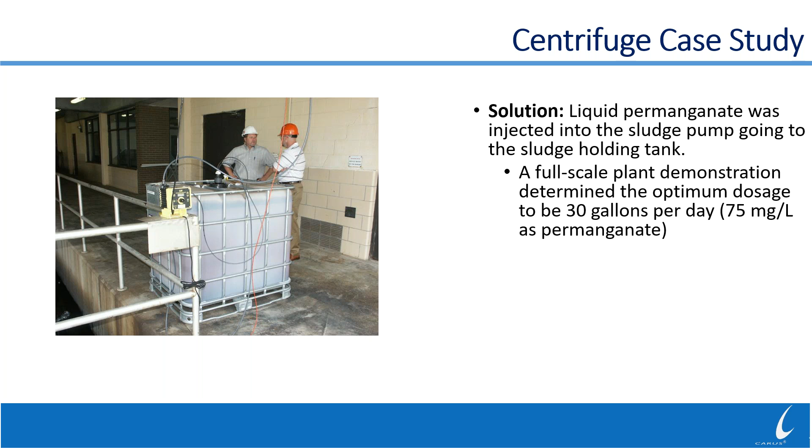By treating the sludge in the holding tank, they were able to knock the hydrogen sulfide down. In the room at the centrifuge, the hydrogen sulfide was reduced above the centrate line from 180 ppm to less than 20. The H2S in the room was reduced from 50 to an average of 0. The centrate that was being discharged back to the front of the plant went from 2 to 3 milligrams per liter of dissolved sulfide to 0 milligrams per liter of sulfide.

And they also noticed because they were doing pre-treatment with the permanganate, they were seeing a slight increase in cake solids over the many months that they ran the trial and continued to do it into the future. The cake solids increased from 24 to 25% coming off of the centrifuge to about 27 to 28%. And so that saved them some hauling costs because they were hauling all their sludge to a landfill.

They also noticed that when they were treating with permanganate they were able to turn their polymer down about 40 to 50% and still see that increase in cake solids. So they were able to pay for the treatment cost of the permanganate with the increase in cake solids and some of the polymer reduction. So that was able to offset some of the cost for the odor control.

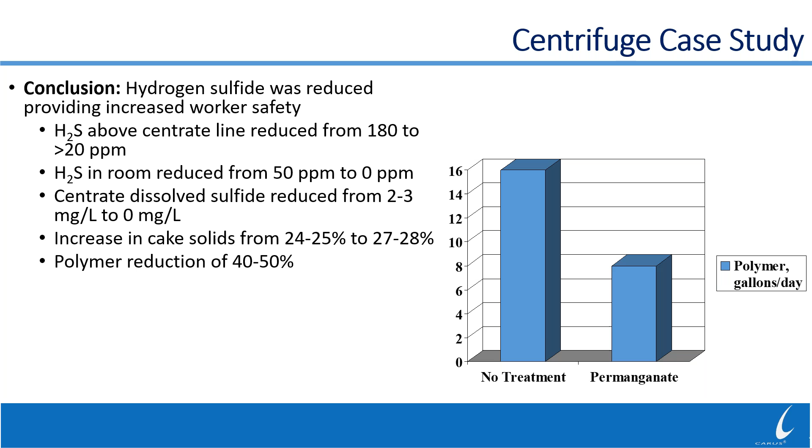Sometimes you might need another option for odor control as well in your system. In this case, it would be our CARUSOL Plus liquid permanganate. The CARUSOL Plus liquid permanganate is available, and it's a 20% combined oxidant solution. So it combines permanganate with another oxidant. It's available in both bulk and 250-gallon IBCs. And it has the same characteristic dark purple color that CARUSOL does as well.

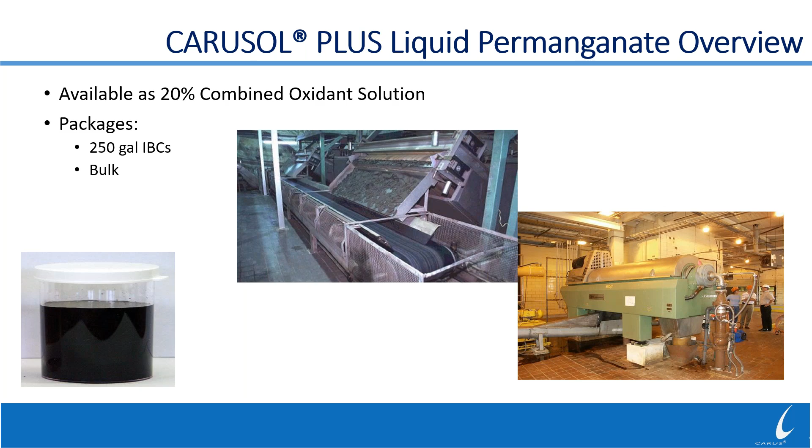Our application for this was at a belt press site at 150 gallons per minute, and they had roughly 3 to 4% solids on the belt press itself before dewatering. They had no current treatment, but they did have odor complaints.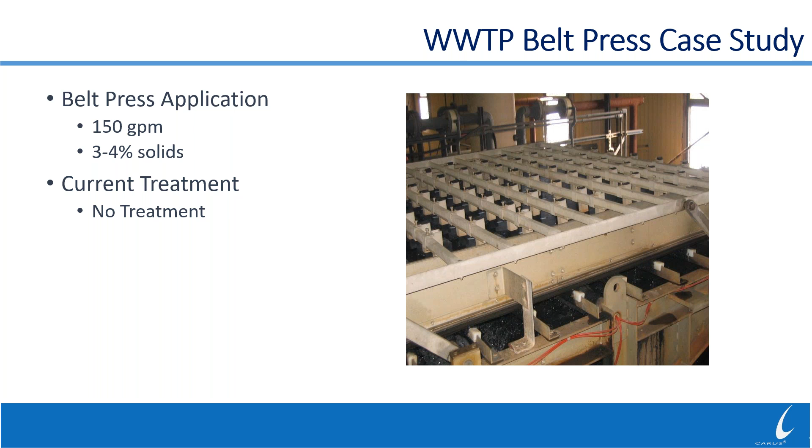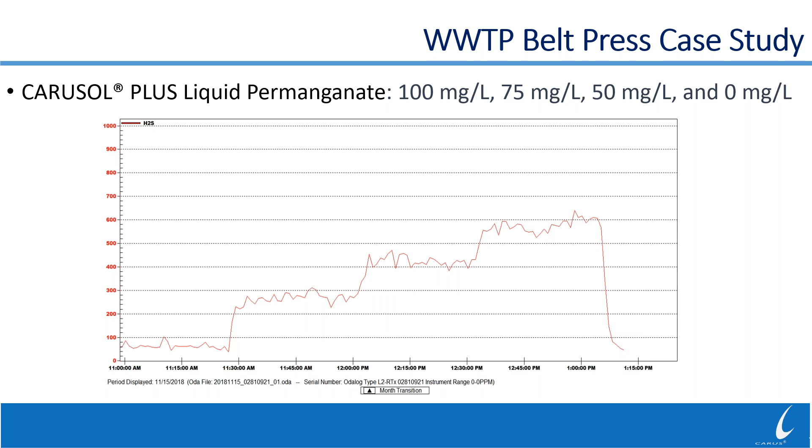During the trial, we tried the CARUSOL Plus at multiple dosages to try to dial in what was the best dosage. You can see that we tried 100 milligrams per liter, 75, 50, and 0, with the highest level of hydrogen sulfide directly above the belt press being about 500 to 600 ppm with no treatment. With 50 parts, we got it down to around 400. With 75 parts, we were able to get it directly above the press between 200 and 300. And then at 100 parts of CARUSOL Plus, we were able to get the atmospheric sulfide directly above the press to less than 100.

What we looked at was several other factors while we were treating the belt press. With no treatment, the dissolved sulfide in the filtrate off of the belt press was about 4 milligrams per liter. Atmospheric hydrogen sulfide coming off the top of the press was 569 on average, and the peak could get as high as 600. As we increased the feed rate, we were able to drop the average dissolved sulfide to 0 with the highest dosage. We were able to knock the average sulfide coming off the top of the press to 64, and the peak atmospheric hydrogen sulfide only was 100 with the highest dosage.

One of the things they kept track of is when they were dewatering, they would open the overhead doors and all the doors to get airflow to kind of move the air around because of how stinky it could get in the room. Atmospheric levels, once we treated at 100 milligrams per liter, became 0 in the room where the operator was operating. And sometimes when they weren't treating, even with the airflow, they were above 10 ppm in the room with the doors open. So it was a way for them to knock the odor down quickly, and they could vary the dosage and keep track of different things to see where the odor was and how much they needed to apply.

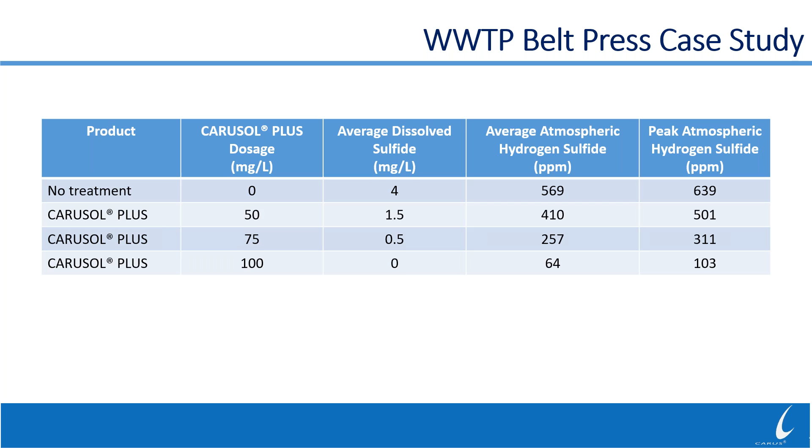So in summary, one of the things you want to do before you have a trial is locate the sources of odors. Where are they at? Are they out in your collection system? Or are they located around a certain process in your wastewater treatment plant? If they're out in the collection system, then you want to try to minimize your detention time, have good housekeeping, keep those wet wells clean of grease, and just move the wastewater quickly to the plant to minimize the amount of chemical that you need to feed in the collection system. Once you're in the treatment plant, the faster that you can process your sludge and the less time that you hold it, you'll also have less odor complaints as well. So those are all things you should try prior to chemical treatment.

Once you've eliminated all your easy options and you have to do odor control, you do have a lot of options with Carus. You can use CARUSOL liquid permanganate or CARUSOL Plus liquid permanganate, and that can be used both in the collection system and at the wastewater treatment plant itself. Generally, the cases where you use this type of product is you have really high odor complaints and you want to treat immediately at the application point where you want to knock it down. So you're treating at the lift station, and that's where you have the odor complaints. Or you're treating at the sludge dewatering, centrifuge, or belt press, so you're treating right there and want to eliminate it immediately.

Out in the collection system, you do have some other options. If you're having a lot of odor complaints over many manholes or lift stations with long detention times, connected sites, then you might want to use TOTALOX Odor Eliminator to provide both permanganate and nitrate for long-term odor control. And you can eliminate both high odor levels and low odor levels.